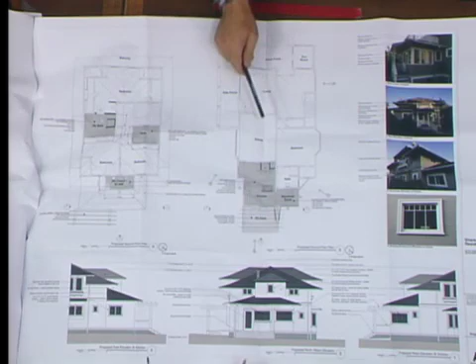So the idea is to open it up and convert the laundry area into a breakfast nook. It has nice glass and a nice general configuration, but the windows don't match the rest of the windows in the house, so we would want to address that.

I can use that pointer. Yeah, right here? Yeah, that's right here — so these were sort of added on. It looks like they don't match the panes. They're not divided lights, and it's an odd, glassy room to have a laundry in.

So it seems like it would be a good breakfast nook, opening it up to the kitchen, and instead of having a door out to a stoop here, have the door from the kitchen with a little bit larger back deck and steps down. The main back outdoor area is right out here, and that laundry would then move upstairs.

The upstairs has a bedroom with a sitting room off of it that would function better for us as an upstairs bathroom, so the laundry would go up into the master bath. It wouldn't alter this — it already has a window in it, so it would stay as is, with no changes to the exterior there.

Upstairs, in place of where that balcony had been, the roof may need to get reframed due to some dry rot and balcony issues, but it would be reframed in the same hip configuration, with a closet replacing the balcony. So you'd get a centered hip dormer on the back side that would match the other sides of the house.

This would be the door out to the trellis that would go over it, matching the side that you guys were seeing earlier. It has 4x6 members on the trellis, and that's pretty much it.

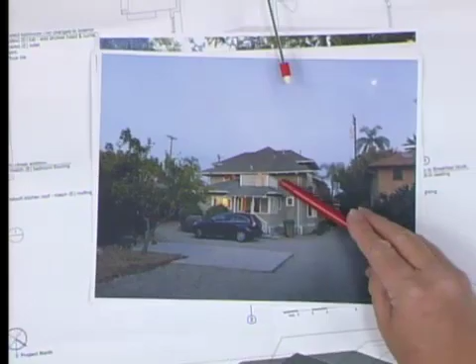We would also add a window here to match the window on the other side, since that bedroom only has one window right now. So over on that side, it would be right here — that's right, okay.

That concludes your presentation? Yes. Okay, then I will open public comment. I have one speaker slip, from Kellam de Forest. Mr. DeForest, you have 1 minute. Yes — 2 minutes, I'm sorry. Right, 2 minutes, thank you.

I am wondering whether a historic structures report — I know budgetary restrictions are probably at play — but a structural report would help document when and what additions or changes were made, and may also document whether the additions and changes asked for would, or how they, affect the historic nature of the house.

Thank you, Mr. DeForest. I'll close public comment and bring it to the commission for questions. Does anybody have any questions?

Mr. Schallenberger asked about the hinged windows, curious how the detailing would work - would you see hardware like a piano hinge, or pivot hinges? The response: there would be inset hinges on one side, similar to the main doors, where you'd see three hinges along the length, and it would swing out and back in, acting like the casement windows already used in the kitchen, matching that style. So it would be an outswing casement.

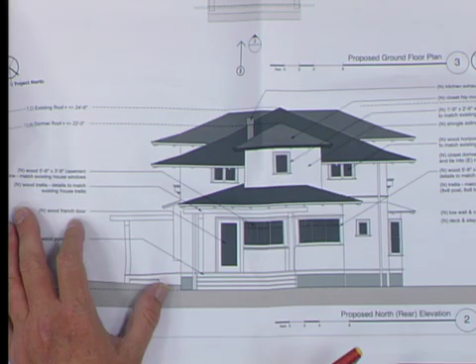When we did it at the full wrap around the side, those two that are tucked up fully under are that way in part because that roof line is so low in the room - the break of the roof starts coming up below shoulder height. Around the side where the dormers pop up, you can see the edge of it, where the dormer pops up, and therefore the second floor gets a full height wall, so you see the tops of windows. It's really because this low roof cuts down around, so head height means you can't stand up in the corner in the back of the bedrooms.

I don't know, does anybody else feel like - no, I do, actually. What's your feeling? Well, I was going to ask, maybe it might even make sense not to have a roof on it at all, a flat roof. There's something about that one element at the back of the building - I was going to keep quiet, but it looks a little bit like a rocket sticking out compared to everything else. It has a vertical expression, and I think what you were responding to, Phil, is why doesn't it have a horizontal expression?

Maybe, yeah, so I think extending the eaves makes sense - it will also bring the roof appearance down farther, making it more horizontal. And I'll throw in one other thing - maybe it's not compatible with the closet, but what if you had two windows instead of one? I think it's the single window in the center that's highlighting this vertical sense again, which doesn't seem consistent with the rest of the house. It's also the size of the window - maybe two smaller windows up there instead.

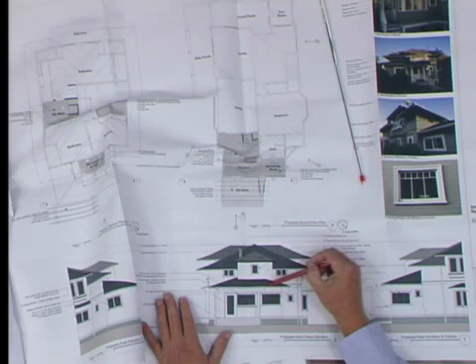But you pinned down what my consternation was about - it appears more vertical than the rest of the house. Sometimes that's okay because it distinguishes the addition from the old, but it's not really an addition, it's almost just a fill-in, like glazing the porch, like what possibly happened in the front. So that's why I'm feeling like that needs to comply or be a little more compatible with the rest of the architecture. We definitely don't want it to look like an addition, so we're fine with that.

We had tried 2 windows on the sides, and it looked a little funny, but we're maybe bringing the eave down with those 2 windows. Try that - we're not saying it has to have the 2 windows, but the point Commissioner Winnick made is that it needs to read more horizontal than vertical, and whatever way you accomplish that, we will gladly review. I don't want to dictate to you what to do exactly on that. Any other comments, questions? Okay, Commissioner Schallenberger.

Kind of back to the window thing, the hinging - I think you have to really pay attention to that detail, especially the one on the north elevation with that 135-degree swing to get by the jamb. My concern is I wouldn't want to see the window come flush with the outside. It needs to stay in the recess that you can see in photo number 4. You can see that it's pushed in, and I'm sure it can be accomplished, but it may require a custom, more expensive window. The other ones, because the swing is only about 95 degrees or so, should still be able to accomplish getting by the jamb. That's a very astute observation, because you don't really want it flush with the...

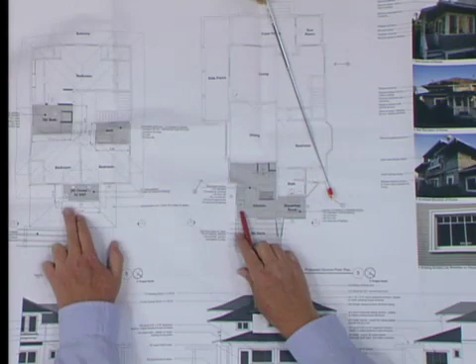And then the other thing was, I see you have a pretty sizable chase for this kitchen exhaust, and then the chimney itself - it looks a little large. Does it really need to be that diameter for just a range hood? It's a range hood, right? So that's the one that comes up through, and on the elevation you can see it - it looks like a chimney. It's actually just a small size, about 900 CFM is what they recommend, and it shows to be a 10-inch diameter.

The only reason I brought it up is it may affect your window layout, having to have that box on the inside. I don't know if that can be reduced at all, or recessed into the framing somehow - maybe notch the frame, some way to get your windows where you want them. You'd probably still want your windows far enough away from the corner that the chase probably wouldn't interfere too much. In fact, your precedent is that the windows are clustered - I think when I was thinking 2 windows, it's 2 windows close together, clustered like that. Yeah, that's a good point. Otherwise, it's very nice - I really think you're very sensitive to the resource.

One other comment I wanted to make was that with the trellis structure, I wouldn't necessarily duplicate in every extent of detail what the side trellis is. Typically, the back utility deck or utility trellis would be much more simplified and stripped, so I think we can pull away from the high detail that's on the trellis on the side - the right side - and make this a little bit more utilitarian, a little more stripped. The side trellis actually is quite simple - we could pare down on the size of members. They're 8x8 columns, an 8x8 beam, and then 4x6 with no articulation of edges, all squared. But it's something to think about.

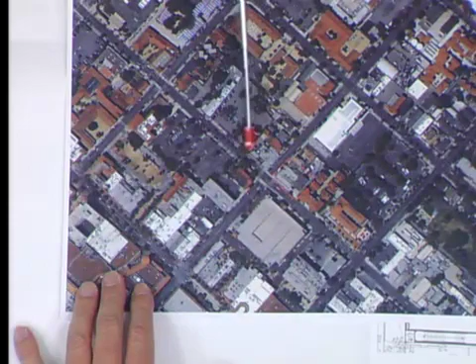I've also got this for you all to reference in terms of what is around this site. Parking lot 11 is across the street. There's a wonderful little 20s pink building with the sort of little Moorish arches, and of course Paradise Cafe on the other corner, the State of California building here, etc.

So one block off State Street, relative to the site, to give you a sense with our footprint overlaid. This is the outline of the existing metal building, this is the outline of the house that's there now, and the rest is fenced off yard area, with a little one-story building right here.

From a plan standpoint, there are some things here that we're going to have to, as Kathy mentioned, go through PRT. I know I'm going to have to pull the building back a little bit to comply with the pedestrian master plan. Really not much, at most 12 inches on the Anacapa side and Ortega, but there is going to be a little bit of adjustment there.

But the concept here is pretty simple. It's really to have an eatery restaurant on the corner that is very open and comfortable. This is going to get great afternoon orientation, a couple of small retail spaces, and then the rest devoted primarily to parking for the residential, because we need one space for each unit. The commercial here only needs two or three spaces, so there's not much because it's in the zone of benefit as a result of parking lot 11.

We're trying to maximize the creation of small little 2-bedroom units because we think that's what people would like, but there's also sort of a studio model against the project to the east. As Kathy mentioned, it's below the 811 maximum allowable average square foot per unit, and that's going to change.

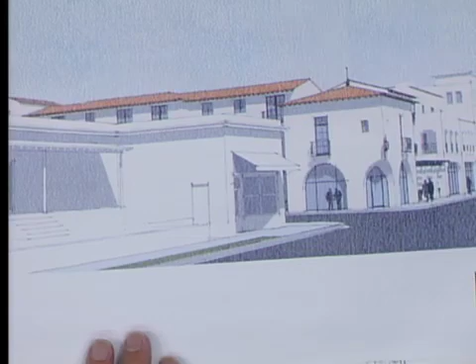Probably the key element to this, let me start with these views. The key piece is really what I want to do at the corner. I wanted to have the corner open from the standpoint of pedestrian access to the restaurant space, with outdoor dining. So I came up with the idea of doing arches where the arch at the corner is split in half, becoming this interesting Moorish-type arch, though it isn't really Moorish because of that cantilever. We'll do some lovely detailing around this window and whatnot, but that becomes the dominant corner element.

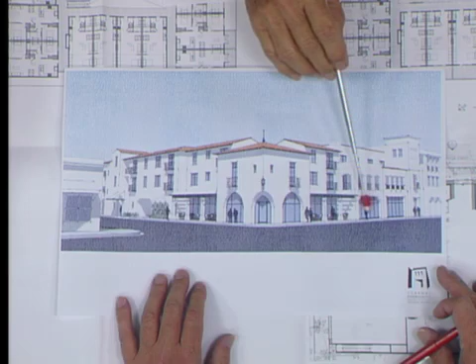This is showing it in relationship to Paradise when you're up Anacapa. Getting a little closer, you can get a sense of the massing, the two outdoor dining areas here. Whether they're covered with trellis or not we still want to study, but we want to set the face of the residential units back from that point. At the new little commercial buildings, I like the idea of making those feel more like 2-story storefronts, in what is a very typical 25-foot width or module for these little shops.

This looks a little more straight on, as if you were across the street from lot 11 - a nice breakup of the city. Then this view is looking back down Ortega towards the corner, where there's a little 1-story building. I'll show you on the elevations.

Speaking of that side, because we're building this wall - the parking area - on the property line, it needs to be closed off, so I'm showing in plan some little pockets within that wall for planting, so we can get a sort of espalier of vines or whatever that could grow over it.

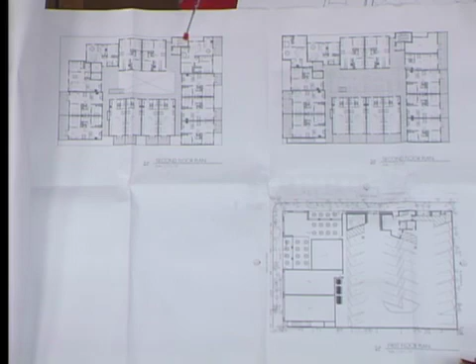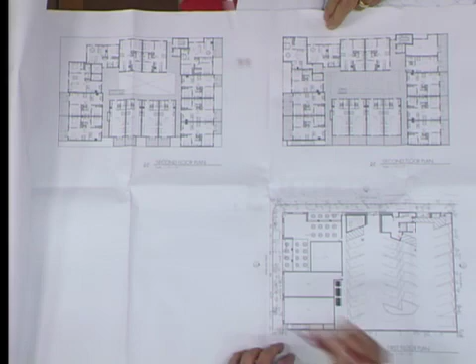The residential units are set back 10 feet from that property line, so units on the podium level would have the opportunity for their own private open space, as would these units on the east side. The building comes flush with the property line, then jogs back, then flush again, jogging back to create light and air for those units. I think the relationship here will work pretty well.

Oh, sorry, thank you - yeah, so there is no unit on the corner. We'll have a chat about that when I get back. I didn't mean to get anybody in trouble. Well, that just happens - they may already be watching TV, so they're very embarrassed right now.

They've left the building. So no third story at the corner, and again we pull that third story back off of that so it expresses itself.

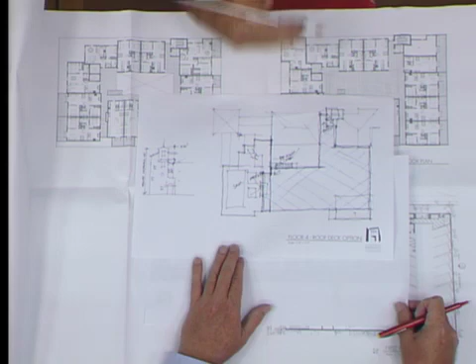One final thing before I get comments or questions - we're thinking about the possibility of doing a rooftop deck. The advantage is that we'd have a lot of flexibility with the balconies, because if I don't do this, each unit has to have its prescribed 6-foot by 12-foot open space, and sometimes those balconies get pretty chunky. So this is at least an idea I wanted you to think about.

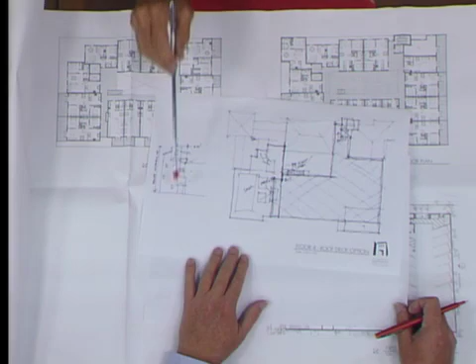Obviously there are two potential downsides. One is that I've got open space over living units below, so that has to be mitigated from a construction standpoint. And it would create this little tower element at my entry - the little entry piece on Ortega then has to grow to accommodate the elevator and stairway going up to that upper level.

So I wanted to at least get your reaction to that, to see how you'd feel about it if we pursued the rooftop deck. Okay, that's the concept. That concludes my presentation.

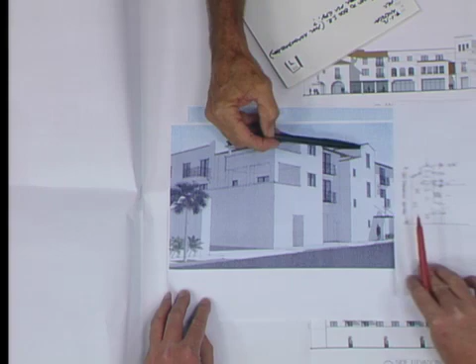Does this represent the tower that would go up to the roof? Yes, that's the pre-sketch. This would be the tower that would increase the height if we went to the roof deck. We don't really have a perspective of that, just the elevation. If you look on the screen, you'll see the comparison - this is without the roof deck, and this is with the roof deck. That's the only piece that would extrude up, aside from maybe some trellises.

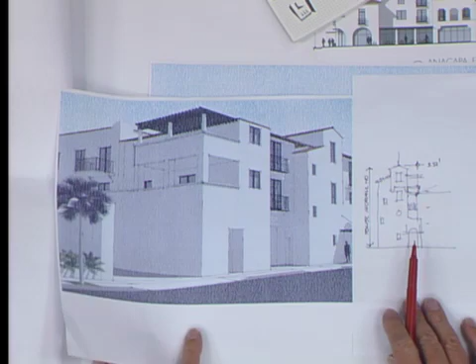But the elevator would extend up to the roof? The elevator would have to go to the roof, and the stairs too. And I take that interior courtyard stair as the second exit off the roof deck - the one that comes down into the courtyard, right here. Okay, so I have a question.

Any more questions, Commissioner Mahan? No. Commissioner Murray.

The height of the buildings - the two-story fronts, what are those heights, and then in relation to the overall building? The corner element to its peak is 33 foot 4 inches, and then the maximum building height to the top of the tile roof is 39 foot 9 inches. Okay, and so it's well below the other building, right? Is this the profile of La Fortuna? Yes, that's the profile of it - I think it's called La Fortuna.

Okay. Any other questions? Yeah, I'll ask one.

It's sort of funny for me to ask this, but Brian, you really made an emphasis on the corner. Let me find the drawing. Here it is. City TV, if you could zoom in. What's interesting, I'm curious in your studies, typically when a corner building is emphasized, it's actually taller. In this instance, it's shorter. I'm wondering if you can elaborate on that.

Well, Anacapa, to me, does have, when you drive down Anacapa, buildings tend to be set back, and it's a predominantly two-story kind of scale. So it just didn't feel right to put a 3-story tower on this corner.

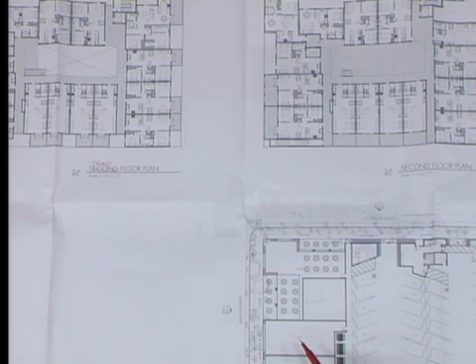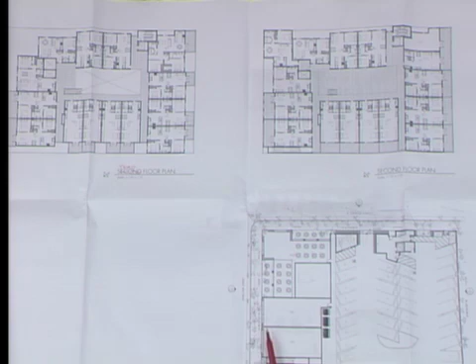Okay, thanks. Any other questions? I have a question. On the first floor, you mentioned incorporating outdoor dining here, which I think is great. It certainly helps with the building not being right on the property line. You also mentioned you'd be moving the building about 12 inches. Is there any room to move either portion of the commercial back a little more so we can get some landscaping here? On Anacapa Street, it's pretty bleak there.

That's a comment, but I think particularly on Ortega Street, some articulation in where the building sits would really help. I'm going to a comment again—you are, this is questions, Mr. Chair—I know, but I think I'm rationalizing my question. It would really help with some of the landscape.

Well, let me answer. The pedestrian master plan calls for these streets, which are 60-foot right-of-way, to have 12 foot 6 inches of right-of-way, basically 4 foot of planter, 6 foot of sidewalk, and 2.5 feet of what they call the furnishing zone. That will facilitate more landscaping along here. As to whether we could move one storefront back or forward, it's possible—obviously I'm squeezed, I want to maximize the retail. But I am thinking this would definitely get a planter here, and we already set the building back to create some planting opportunities along here, and we can look for more.

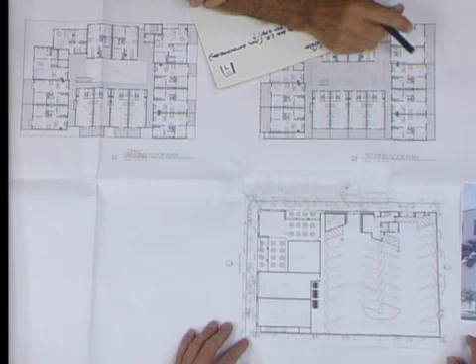Okay. I have no other questions, so we'll go to comments. Any comments from the commissioners? Sure, I'll jump in. Commissioner Winnick, please.

Sure. First of all, I think this is really a nice start for a project. I think the size, bulk, and scale is supportable, and it's an appropriate application of an AUD project in the neighborhood. It's nice that it came in the door not starting with a 4-story building with the intention to end up at a 3-story building—it's appearing as a 2-story building on the corner, but it's 3 stories. So I think these are all sensitive and a smart approach.

I think if I were to look at one of the elevations, the one thing I saw on the Ortega elevation is I didn't see quite as much variation there as on the Anacapa elevation. So maybe just put the two together. I think the Anacapa has got more interest and is working a little nicer. I see a lot of alignment of the roof on the Ortega elevation that gives an impression of the building being kind of long. So I'm thinking that would be something nice to study.

I could support the roof deck. I think that tower structure, in that one instance becoming a little taller, is going to make it a more successful elevation and will help break up the length of the Ortega elevation. I think having that kind of amenity is really valuable—if we're going to put residential living downtown, let's make it really successful. So I would support that.

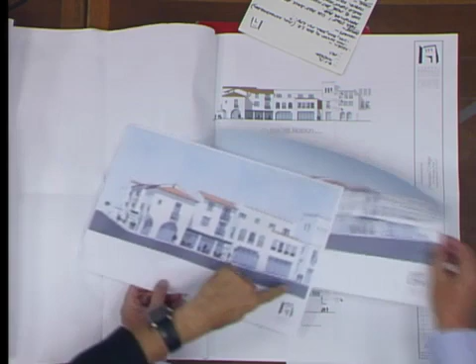I'm only bringing it up because there's been criticism in the past - you didn't tell me this earlier, we didn't mention that there was a problem with massing. I'm not even saying there is, I'm just suggesting. You're channeling absent HLC members. Well, I'll tell you, because at Paseo Chapala, the 3rd-story massing right at the sidewalk line, right at back of sidewalk, was a major issue and a major problem. This isn't even a personal comment, it's just that it was a criticism and it caused problems in the past. So it's only to say it now so that it gets addressed in some manner.

I think the project is very nice, it's a great concept start. I love all the interplay of the different types of balconies, recessed balconies and Juliet balconies. I think it looks very nice. I just wanted to comment, since we're here at the first thing, we're supposed to talk about size, bulk, and scale at this meeting.

Any additional differing comments? I have comments. Go ahead, Commissioner Mahan. Well, yeah, I agree with those comments, and I think it's a nice project. I especially like the corner element, the 2-story corner element, which I think is very compatible with the pink building catty corner across the street, which is also a 2-story building.

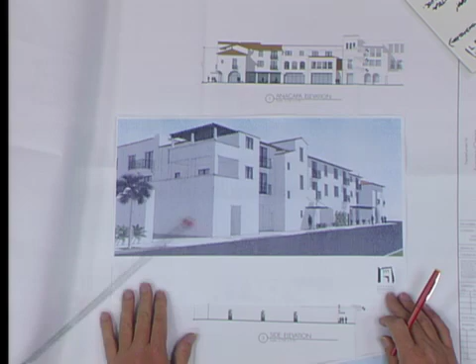The corner at the end of the Ortega elevation, the perspective shows it better, I think, than the elevation. This strikes me as being bulky. Size, if you want to talk about size, bulk, and scale not being appropriate to El Pueblo Viejo, maybe this is the element that doesn't work very well yet. It's just too brutal, that needs work. But down this way it looks great. You gave a pass, I figured he'd solve that.

Okay, any other differing comments? I concur with all those comments. I just want to say that the Ortega side, this is the side that faces all those wooden buildings, kind of a neighborhood residential area, so the softer it will be, the better. So doing something about this, which faces that side - oh, watch it with the pointer there - and that sort of view to the mountains will be refined, will really help.

But I concur that all the concept is right in scale. One other comment that I think is important in terms of neighborhood compatibility: we do have the parking structure across the street, the Barry Berkus building, and the Beacons building on Cota Street. So there are a number of large buildings, the Lions building, and down at the corner, the Anacoda building. So there are a number of larger buildings, and it was a long time ago. Luck will have it when you're on the southeast corner, you're not blocking mountain views - like for instance, this size building where Paradise Cafe is would block mountain views, but in this direction it doesn't.

Well, I want to have a minimum clear height in the retail and restaurant of 12 feet. I'm sorry, this wall here. Well, but that's going to set the podium height. This sets that podium all the way through. I can't change that level at the second floor. So that's what's really governing it, is having a viable height at the retail and restaurant, which I believe a minimum really is 12 feet. So 12 feet plus 2.5 feet or 2 feet of structure, and that puts me at 14 feet.

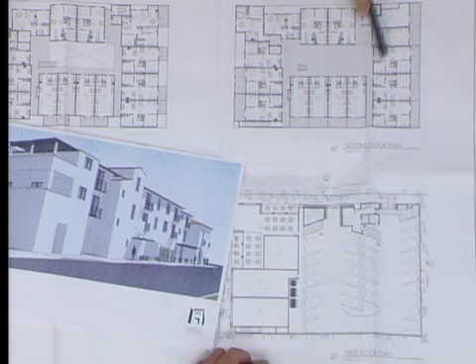But these walls can't drop down? Well, no, because then I have a break in the courtyard space. But you could have some opening in the railing. I could absolutely do that. I think treating that railing differently, I could.

Excuse me, Mr. Mahan, I thought I had the floor. Thank you. The other thing I could do there is, again, if I do the rooftop deck, then I have flexibility, and I could do roofs - I could have a one-story tile roof.

So my comment is that side elevation, that north wall, needs a lot more relief than what's being provided. It needs a lot more work. Similarly, to go off Mr. Mahan's comment, and I hate repeating comments, but I do feel strongly about that mass, bulk and scale - it's just not working. Couldn't agree more. That sort of reminds me of the Anaconda building.

Okay, any other comments? Wait till you get your motion. We'll look for a motion then.

No, it's just comments only. Yeah, but I was thinking project design approval, but no, we can't even, so somebody want to make a motion then? Sure.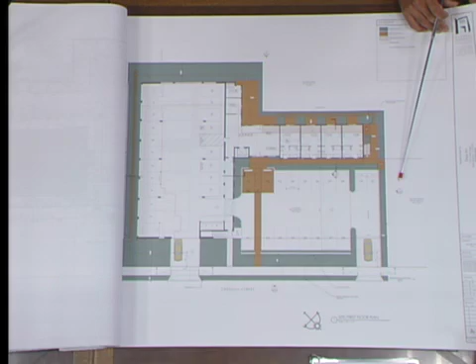Through our PRT process, we realized that we applied for this mod, which is for the second floor, to encroach on the 15-foot setback since it's a two-story building. Essentially, it's just the exterior exit balcony that will encroach. That was previously supportable because it's adjacent to this residential zone—well, it's zoned residential, but it's a hotel which will likely never be used as residential in the future. So we have staff support on that, but I wanted to get your input on this issue.

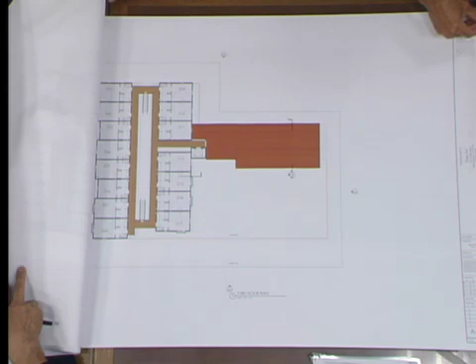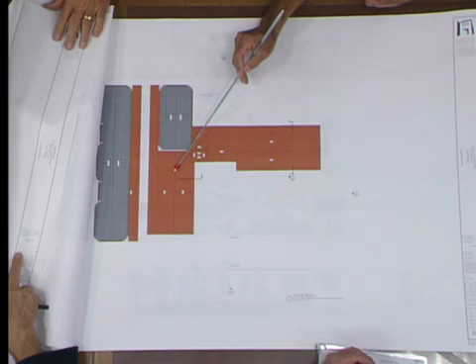When I look at my roof plan, the setback for this back property line is half the building height. We're calling the building height of the flat roof area 30 feet, so this requires 15 feet from the back property line. However, part of the design was trying to differentiate between these two roof elements, so we left a gable end at the front portion of the building, which isn't sitting on the back part of the lot. So we'd like to go for a mod for the building height and keep the 15-foot setback, knowing we're over 30 feet at the front. That little gable elevation tip is really what it is, and I think it helps make this a more dynamic elevation by having this flat section and this nice gable end here. So that addresses the mods.

As far as the secondary driveway, we did try to eliminate one driveway with transportation, but we didn't have any success. They actually made us increase the width of that driveway slightly for fire department access. One of the problems we have is getting to the back of this lot, and they need to get their fire trucks up to this point so they can get their hoses back here. So we had to create a pathway in and around the lot to get to this back corner.

What was the original width you had? I think we were at like 12 feet before. So they needed at least 16. We tried to argue our points, but... The additional 4 feet came out of these planters—it came out of this one, because that one's required.

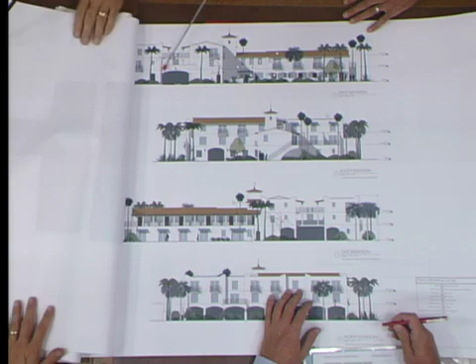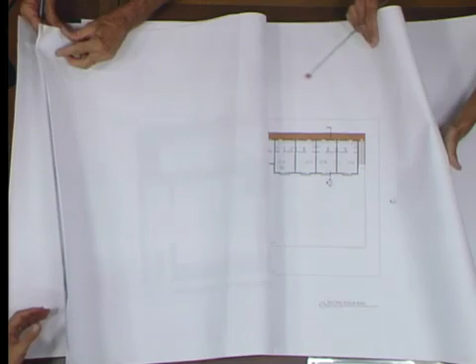So that's the driveway issue. The arch leading into the parking lot—we already had that as a thick arch element, but we further enhanced it by engaging some columns on either side. Then we added, I don't know if we had this articulation before, near the spring line of the arch, but we did the same detailing on the arch on the side elevation. If you look in plan, that thickness is at least around 18 inches. This column is about 18 inches deep, and it's thick here too as well—all the openings along there are fairly thick.

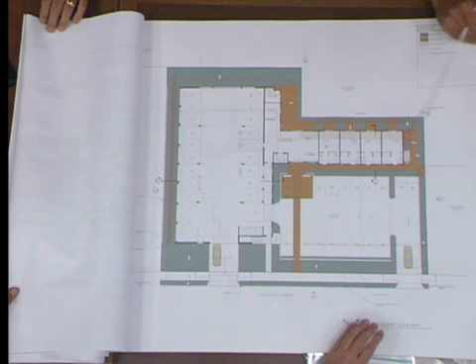As far as the parking lot, let's go back to the site plan. There was a comment about it being more special and feeling like a lobby, so what we felt would work is if this felt like a plaza. We enhanced the plaza feel with the paving here, and then added a canopy at the entrance—I think the Eagle Inn has something similar, maybe not wrought iron, but you can see it here. We still have the partial height wall on the front that would hide all the parking from view from the pedestrian, but we thought that would be a nice entry element to enhance the plaza, and then that'll lead into the landscaping, which we enhanced further.

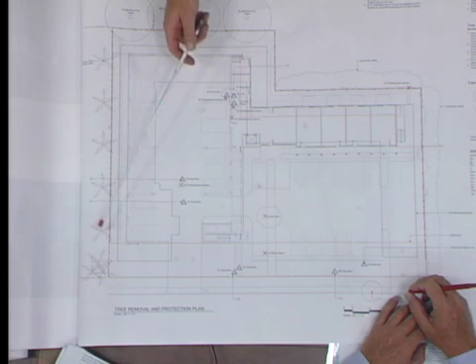Okay, real quick, over on the adjacent property - that inn next door - there's a number of king palms along there, so this whole area has quite a few king palms. There's an existing soap bark tree here, the designated street tree, so we'd suggest adding a few more along this parkway.

That one right there will remain as is. Right now it's not in the best condition, so I think it might be worthwhile for the city to take a look and determine whether it needs to be replaced. We have some existing vegetation on this side, and here some fairly large existing silk floss trees, and a willow on the adjacent property.

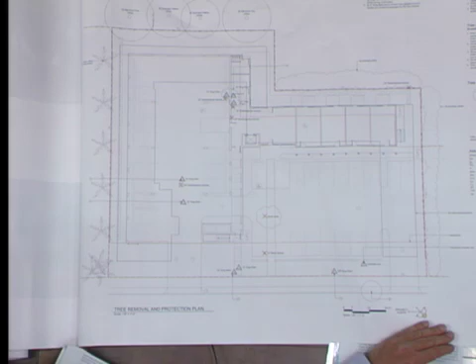This is on this side - we're looking out onto an empty parking lot for the hotel over there. Within these areas you can see right here, we have a number of clusters of existing king palms, and we'd suggest relocating those elsewhere on the site for construction. So we want to keep those as much as possible.

There is one black acacia right here that we'd suggest relocating, because I think we have a good spot for it elsewhere. There's an umbrella tree on the corner over there that we'd also suggest relocating, and we do have a spot for that. So we've taken these and shown on the landscape plan where they would be relocated.

Any of the Washingtonias being relocated, or are you removing those - all of those? We're going to take those out. Okay. We're just going to concentrate on keeping the king palms at this point.

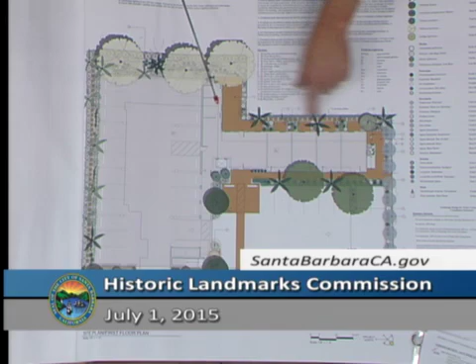And then on the west side over here, we'd be suggesting again introducing some of these existing and proposed king palms along there. It's very narrow as you can see, and we have to provide access here, so we have some pavers that get you there - same on this side, since the fire department requires that. But we still want to create enough feeling of privacy for these individual units.

In this back area we have sycamores, and this is more of a shady area, so more shade-tolerant species and understory plantings around there. This is where you're looking out at the parking lot underneath here, so not too many people will really be seeing this, but you'll get a sense of it when you're up in the upper balconies.

Here in the front, this is kind of a bioswale drainage area, so water from the site will be draining into here, and we're accommodating that with a mix of grasses, lomandras, and succulents, and plantings of that nature.

These trees right here, we're suggesting a combination of desert willows and Phoenix roebelenii - we're going to have some of those. We also suggested a few peppermint willows after dark here to go against the building for a little bit of contrast. I wanted to check with you guys to see if that was working as far as historical context.

And then here, these would be podocarpus, just a hedge of podocarpus - they already have some there, so we'd just be working along with that. And then just soft plantings, a combination of chondropetalums and whatnot, again to create a sense of separation between the parking and the circulation areas.

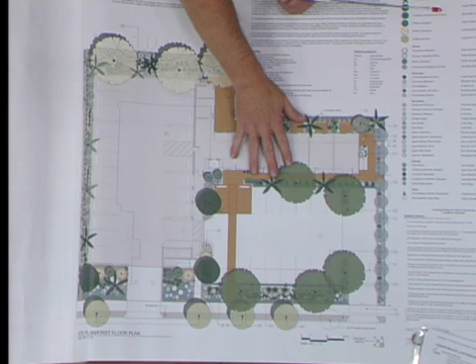This is about, ultimately - obviously this is about making findings in terms of views, size, bulk, and scale.

Okay, so we've provided several views. It's a little hard for me to see upside down on this part, but as we walk up Castillo Street, this one is probably, I think, the worst case scenario right here.

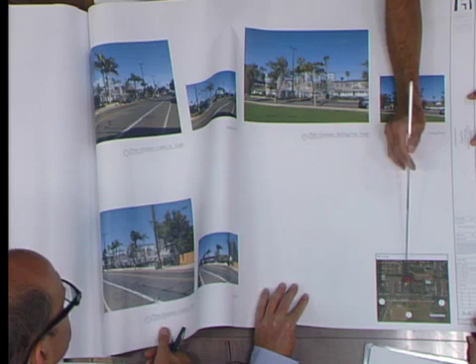What we've done is highlighted what we believe would be the impacted view area of the park and ball field. Once you get past into the ball field area and over into this wooded area, there's not much view impact, because one, you're far enough back to see over all the buildings, and over here, given all the existing tree lines, you can't even see practically across the street because of all the existing trees.

So here we have the existing view, and then this is the view showing the three-story portion. As you can see, this area has the existing trees, and we're actually proposing more street trees.

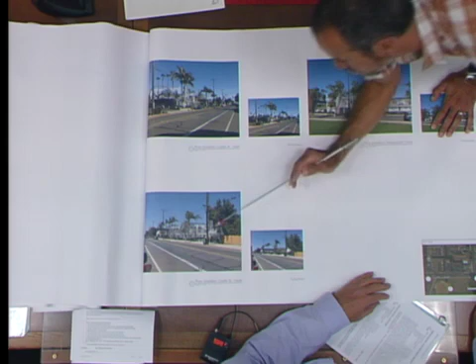I think the trees that Jack has proposed will probably provide more view blockage than our building ultimately would. Here, as we step back, there's no impact, and then further down the building you get a little sliver we're losing. The two-story portion in the back is contributing to that.

If we continue down the road, these are more relevant - those are more like street elevations, and these are more relevant to views from the park. In most of these cases we're so far back that the mountain crest is still visible in all these views. There are so many trees in that area, and these are the locations showing the impacted view area.

I supplemented the photos as I walked up Castillo Street this morning, showing the views you'd see as you walk up and look to your right, to give more context. What you'll notice is that as you walk up, all the development, even some of the single-story structures, provides some kind of view blockage. It's difficult to do any type of building without having some impact.

But in general we feel like we're complying with the mountain views. I would probably reconsider putting the street trees in, because I think that's actually going to be the most impact out of anything we're proposing here. So that concludes our presentation.

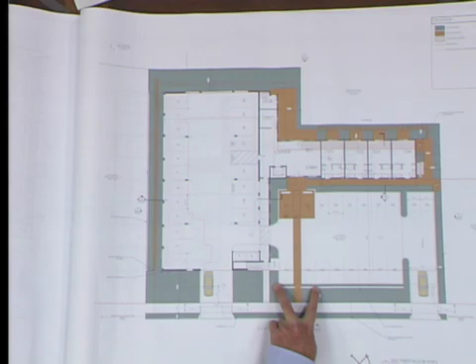I don't disagree that maybe there could be a stronger connection there, but I don't think it should be full width, because that dilutes and diminishes the sense of arrival when you get to that plaza you're proposing. And then with respect to the landscape, king palms are difficult to transplant. They're very sensitive.

Washingtonia, Mexican fan palms, are much easier to work with. I know they're totally different trees, one will get twice the height of the other, but you have some decent sized Washingtonias there. I would like you to study utilizing or relocating some of those Washingtonias, since king palms are difficult to transplant and you may end up having to buy new ones, when you could use the Washingtonias in strategic locations where the scale is appropriate.

And then I actually lied, I had a third comment. I think it's the Chilopsis - planting that in a bioretention swale might prove problematic. It's a desert willow, it likes more dry conditions. Certainly they can take it, they grow in washes in the desert, but it may not be the most appropriate tree for the aesthetic of a bioretention, as well as the cultural needs of it.

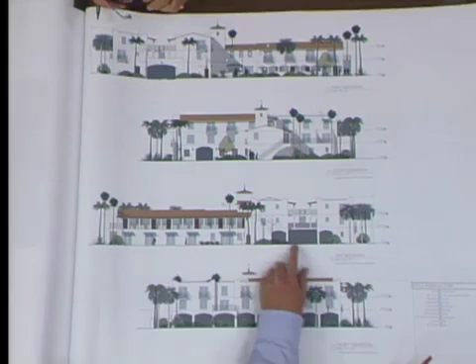Actually, I came up with two more comments on the elevation. On sheet A201, the east elevation number 3, I'm a little uncomfortable with what's happening here. It feels like these columns need to go to the ground, or this needs to be thickened. It needs more mass there. Maybe that could be accomplished with a solid wall instead, but it feels like this is too much of a span without either those coming down, this being thickened up, or doing a different type of opening there. But that's quite wide.

Is that an open area issue as far as ventilation in the garage? So we could close that down. Yeah, we'll look at it, but I can make it thicker, and we can relook at the column.

There's something there. And then just as kind of a joke, Mr. Kiesel's license has expired. What, when? 12/31, 2014. Got to talk to your staff, right? I think he probably is. What, could be note to self? Right, that's probably how old the drawing is.

Suding, yes. So the next step for this project would be Planning Commission, and the municipal code asks that Historic Landmarks Commission go through the compatibility analysis for the benefit of conversation between HLC and Planning Commission. Sure, thank you, Mr. Gullett. I'd like to mention that we have Planning Commissioner Lodge here if she wishes to speak at all on anything or have questions.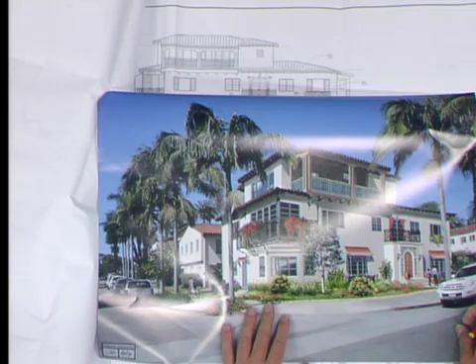Can we get the rendering maybe? It'll cantilever off of, yeah, it'll cantilever back. So you're talking about right here? Yeah, so if there's a steel member that goes back into the building, that's going to work. We're going to be doing a lot of new structural work on this building.

Okay, any other questions, commissioners? Yeah, I have one. Commissioner Winnick: I know you were asked to study the front entrance, so I'm just kind of curious what your precedent was for what you chose at the end of the day, or the thinking behind it.

We were trying to get more outdoor living space for the units, and in fact Unit 3 upstairs had none. So I was going to have a path over here and have some outdoor living space on top of the existing garage. This actually worked out better in my mind, in that this view from this deck, both to and from up Mason Street to State Street, gorgeous view of the mountains beyond, direct access off of this level. That's how it grew.

Got it. And I probably should have been more precise. I think that all makes lots of sense. I think what I wanted to know is what your references were for the fenestration - the style of the doors and the lights around the doors and all that. City TV, if you could zoom in.

I totally get the balcony idea. City TV, if you could zoom in. This started with what is the street up by the Mission? They're the string of homes - Junipero Plaza? Yeah, Junipero Plaza, Plaza Rubio. Yeah, there's one entrance that had the tile set in just at the top here.

It was at the entry, and there was a patio above that I liked, and I wanted to - I thought I could enhance that and build off of that and create this smaller patio, and I like the idea of carrying the plaster motif and tile all the way down with the fixtures on either side. Beyond that, it was something else I've seen in the past - I can't remember where I saw it.

All right, any other questions, commissioners? Going once, going twice, gone. How about comments? Any comments, commissioners?

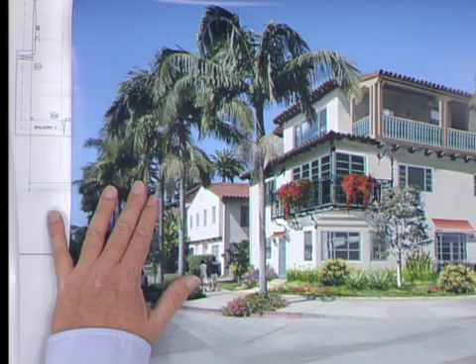So I guess since I asked a question, but she's talking, so go ahead. Go ahead, Commissioner Winnick. Since I asked the question about the entrance, my thought is it looks a little bit like it doesn't totally go with this house - that's why I was asking, so I was trying to figure out where the style is. But I think the one thing I'd want to see, given the amount of energy, let's say, that it has, it seems to me like it needs more recess or something.

Anyway, it just seems like there's not enough relief. If it were to push back, I think it would help to have more depth, some shadows around the door and those elements. It feels very much like it's on the surface. So that would be my impression.

I wasn't quite sure where the arch was coming from. It seems like it's a slightly different style than the rest of the building, but not enough to have me weigh in heavily to stop where you're going on the project. But I would encourage some more recess, more relief, particularly with the door.

Anybody else have any comments? Commissioner Mahan: I'll play off of that comment there.

I have some problem with the arched door. I would ask you to look at the entrance to George Washington Smith's first house on Middle Road. It's an entrance kind of like this and has a balcony on top. Also, I believe the News Press building, which George Washington Smith also did, has a very similar entrance. It's very powerful but has a certain simplicity that I think would fit in better with this building, with the Monterey style at the top and the rest of the building fairly simple. Maybe this arch with all the tile around is too fancy for the rest of the building. Look at what Smith did for the entrances to the News Press and also the Heberton House on Middle Road, and see if you don't think that would fit in better.

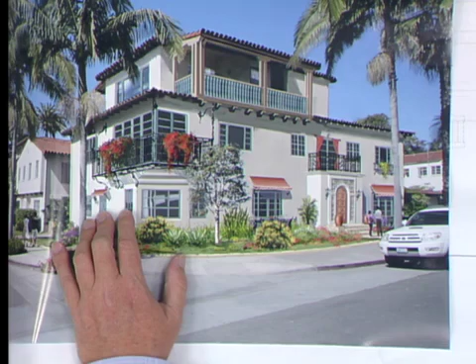The comment I have on those, Mr. Gurel, is that they feel a little contemporary, almost mid-century, and that's not what you're going for in the rest of the house or the fenestration. I'm not sure the rest of the commissioners agree with me or that I'm even on the right track, but maybe it has to do with the proportions of the breakups. I see you're matching the proportions of other breakups on the building, but these have more vertical proportions. I don't mind the lightness of that corner, but it's feeling to me like a mid-century modern solution. I could be convinced that's the kind of thing they did in the mid-century to these Spanish colonials, but I don't know.

Commissioner Mahan: Chair, I agree with you, and I think it's the proportion of this rectangle here that's not quite right. You need one less horizontal - 1, 2, 3, 4, 5. If you went to 4, I think it would work out okay and feel more traditional.

And from the standpoint of this being the great view of the harbor, you'd be happier with fewer mullions than more. Yeah, my client would like to have none. I think you could bring this rectangle closer to square - not square, but... May I mark on it? No, not on that rendering, flip to the elevation.

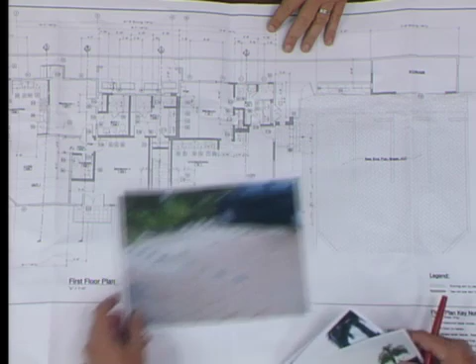Okay, something else that might help - can I finish with one of my comments? With respect to the pavers in the driveway, flip to that sheet because it shows those pavers there. These certainly aren't acceptable in the district, and they don't really work. Something more in this vein with a tumbled look would be better - there are a lot of different permeable pavers out there that don't look so interlocking, and look more like cobbles. That's what I was saying. Okay, good.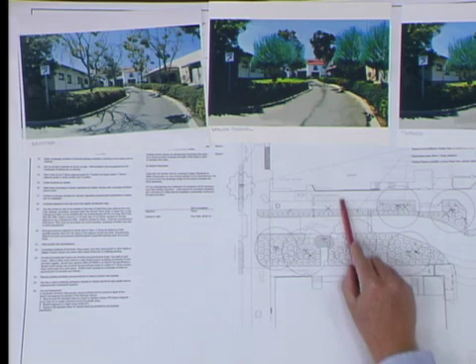Great. So if I can just add, we did lose one queen palm on the front parkway as well, to open up the vantage point of the Arlington Tower. So we are equivalent in the quantity of trees that exist versus what's proposed.

Okay. When we had the other trees in, we had a couple more trees in the area. All right, I will open... Does that conclude your presentation? Yes. Okay, I will open public comment.

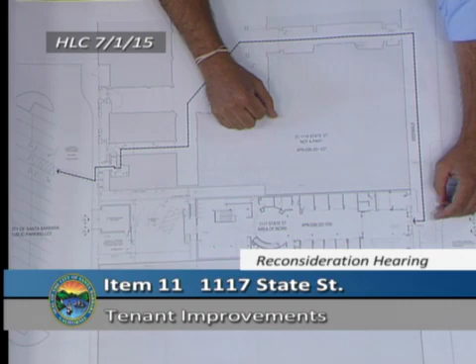This building is right across the street from the art museum. There's a storefront right on State Street, and it connects through to the city parking lot in the back. There's a small lot behind the building. What we're really here for today primarily is the storefront, which I'll show you a photograph of. We've proposed some new outdoor dining in the public right-of-way and a new gate in the back parking lot. That is the project site.

That's correct. City TV, could you zoom in, please? I've got a bigger photo here for you. Is this the one that used to be Kim 3? No, I think it used to be Z Gallery, and then it was a rug store, I can't remember the name. It's been vacant for a while, though.

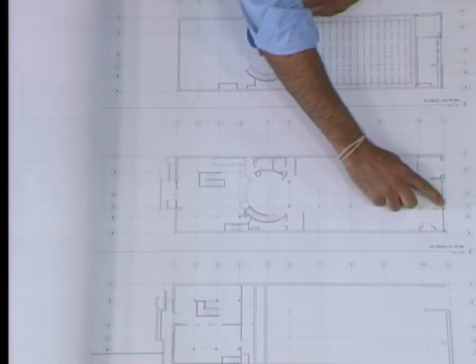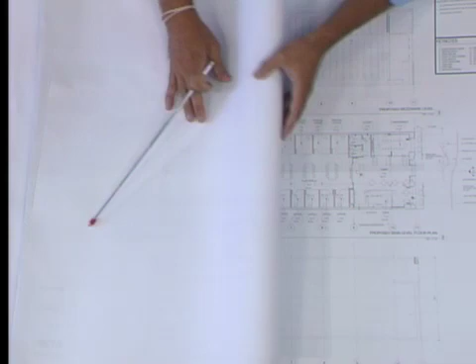So what we want to do is allow all 3 of these storefronts to operate. We're proposing a small cafe in the front of the space, and we want it to be really lively and relate to the street well. There's also a conference room space which could be used for events, and we want to open all these storefronts so the public can interact with the space.

So we're proposing to move the storefront line back 3 feet from the property line, so we can have doors open out onto it without crossing the property line, and line up the glass across all 3, which will give a bit more depth to the facade, an improvement I think.

We've proposed a small outdoor L-shaped iron rail flanking the main entry on both sides, with room for probably 2 tables in each. There's also a bench in the sidewalk which we want to recess into the planter. That planter has a big missing spot of plantings that needs replanting, so hopefully we'll move it into that spot and extend the brick.

This configuration in layout and dimensions is nearly identical to 2 situations one block further south, one in front of Palazzo and one in front of Chase Bar and Grill, within a foot of these dimensions.

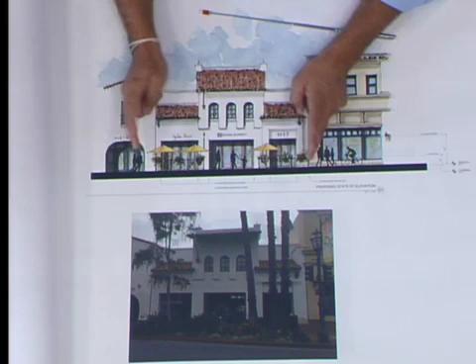So the main entrance is right down the middle, with 2 operable openings on either side. We thought about proposing some divisions to the top of the doors, since most places up and down State Street have some kind of decoration at the top of the glass, but this is a really low head height, only about 9 feet, and we want as much light and view of the inside and outside as possible, so we're not proposing any divisions.

Right now we want a wood door with maybe some stain, but a natural finish—imagine the doors in front of the Indigo Hotel, that kind of look. We're open to your suggestions, especially since there are windows up above which are aluminum frame, not the most characteristic windows, so this would be a great improvement down here. I'm a little concerned about not matching them, but it'll be great for the inside too, since we have a spare industrial aesthetic with raw wood framing and concrete exposed. So we're open to suggestions on the finish of the doors and the railing.

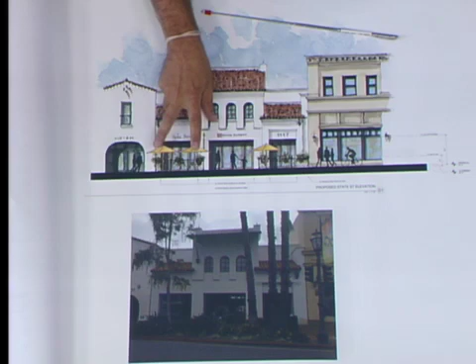Next time, when we come back in 2 weeks, we'll have details on the rail and street furniture for your review and approval. But any guidance you can give us now would be appreciated as we finalize those choices for the next meeting.

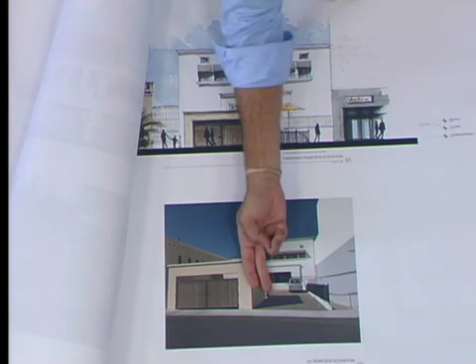So that's the front signage. We'll go to the sign committee—we have 3 new locations for signage. And in the back we have a sliding gate, just a simple iron gate that slides behind the trash enclosure. The owners are really considering whether they want this, and I think most likely they'll pull it from the plan, but we've got it here today, so any brief comments you have we'll take as well.

Does that conclude your presentation? There's one other point I'd like to make. We would like to submit to the building department—we're ready now, and we've been informed that we need to have in the minutes from the Historic Landmarks Commission that it's okay with the commission for us to submit to the building department while the review is continuing. At your own risk. Correct. Okay, that concludes your presentation? It does.

Ms. Kaufman: just a reminder that everything in the right-of-way requires separate review, it's not part of this review—it needs to be reviewed by Public Works. Right, okay, and I will open public comment.

You enter into a covered vestibule. There's a gate here, and you enter into a covered vestibule that's outdoors, and then the entrance into the enclosed space is right along this line. So this is the 172 square feet which we're going to be enclosing, moving the door to here, and it becomes part of the net square footage.

Outdoor space right now? It is, yeah. So it's basically this being enclosed now. It's not air conditioned, it's street conditioned.

Okay, any other questions, commissioners? Going once, going twice. Comments? Any commissioners have any comments?

I'll jump in. I mean, I think it's a supportable project. It's quite funny because the entrance really was on center before. If you go back less than a year ago, it was with a central entrance. And it was, I think, giving a more consistent storefront expression. I don't think we'll ever complain about having wood doors versus having metal doors. So you were asking about that, I guess maybe you're asking the finish question. I'm fine with wood, I'm also fine if they were a dark painted finish. But I think what you're proposing is certainly supportable.

The street encroachments that you're proposing, I know it's not part of the project that we're getting to review, but I think I would be able to support them too. With maybe a little question about what's going on about losing landscape and putting a bench in place of it. That would be the one question, but it's really not part of our review today.

So I think that's pretty much what I would share. Okay, any comments, Commissioner Schallenberger? It's actually back to the question. Are you proposing any changes to the facade itself? In other words, the plaster facade?